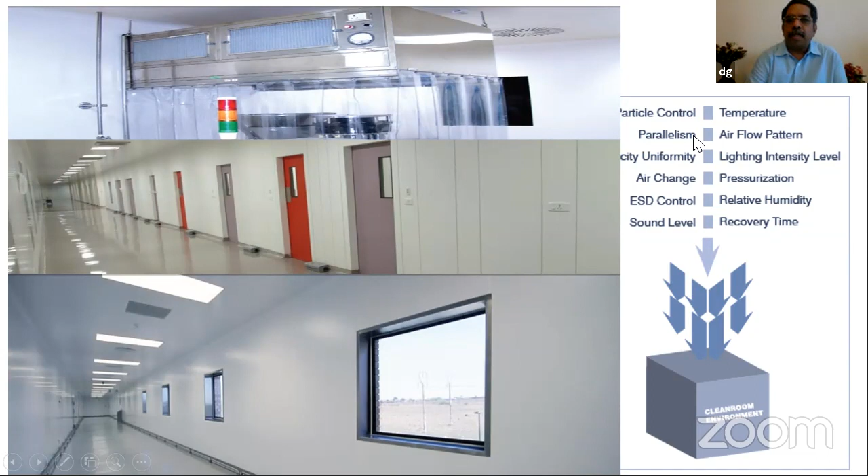Now all these parameters need to be moderated according to the processing technology you're talking about. But the most important parameter that distinguishes a conventional architecture from a clean room is the isolation table.

Here you can see, typically if a cabinet or room is housed near a metro rail for example, you can think about primary airborne sound which is internally present, secondary airborne sound coming from the metro, and structure-borne sound, plus thermal vibration. So you're talking about acoustic vibration and thermal vibration together, which can rattle any structure sensitive to these vibrations.

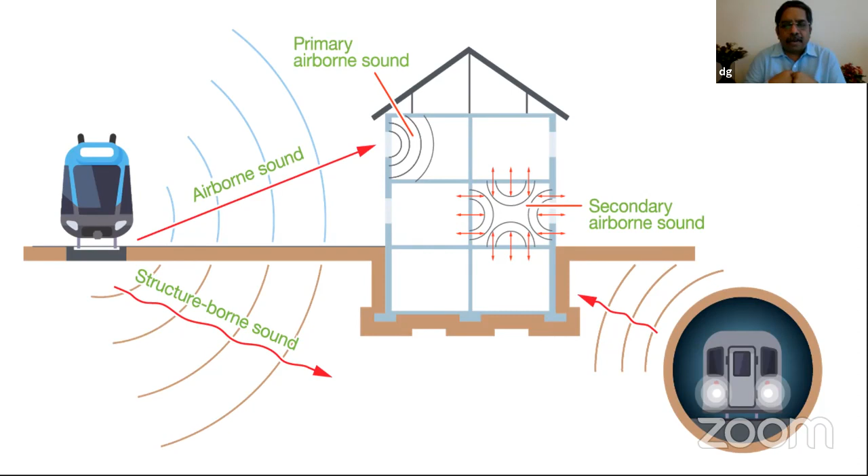Now in a clean room, we actually use a vibration table. A vibration table is a slab which disconnects the room from the building, and the building from the rest of the environment. Therefore, even if there is a mechanical, thermal, or acoustic vibration outside, nothing should technically harm the clean room inside.

In the pictures shown, you have to take care of all these 3 vibrations and isolate your room. This is a cross-sectional view graph which talks about the number of elements one has to take care of when setting up a clean room.

That talks about the perforated flooring, for example, because if you're looking at a very low particle count, you need HEPA or ULPA clean room filters not only on top of the ceiling but also, as you can see here, a perforated floor. The flow of air will be from the top, directly sucked to the floor, or sucked through a return duct kept at the side of the wall. So when you think about a clean room, we are talking about many devices.

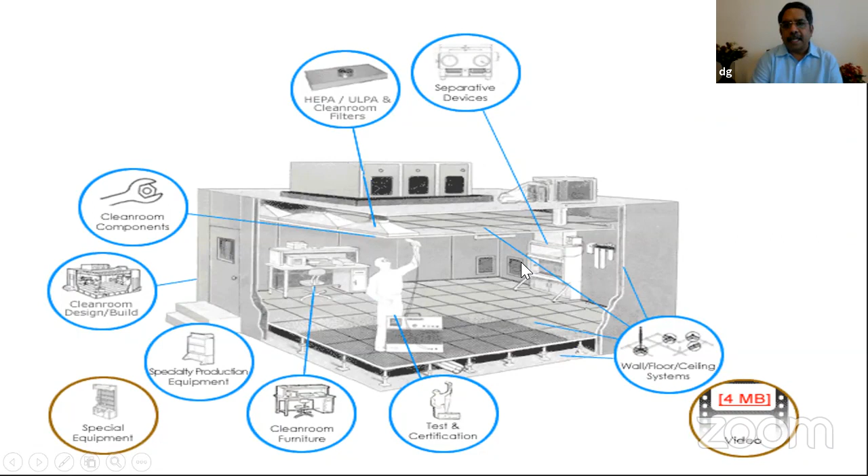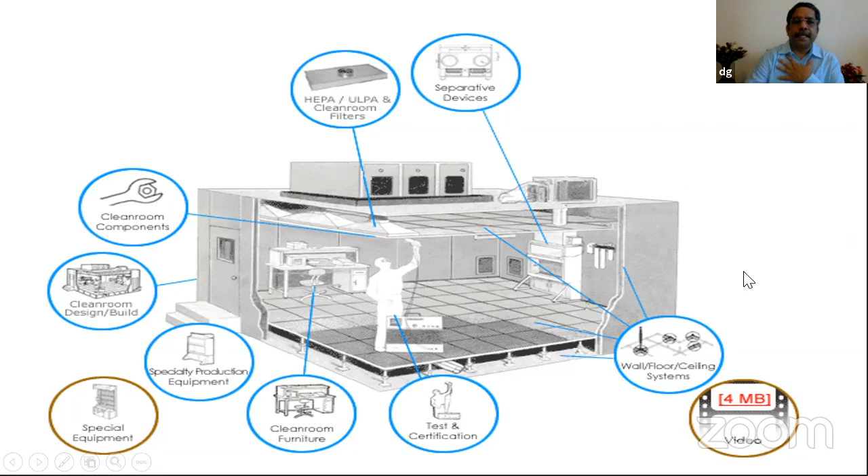First, we take care of the architecture of the ceiling, the design, and the special equipment that needs to be kept. For example, if it's a biological component with specialty production equipment, the suction or return air duct around it has to be different from the rest of the room. Here, another cabinet has a different return air effect compared to the rest of the room. So all these parameters need to be taken into account when talking about the clean room environment.

Now this view graph brings another challenge. It's not only important for us to take care of vibration, the anti-vibration table on which the room has to be set, but also the flooring, the duct, and how the return air is going.

Now, the civil engineering part is not that simple. As I already told you, you have to build a room within a room, a clean room within a clean room, to ensure 100% safety in terms of vibration, light penetration, return air, particle size count, and so on. There are many issues one needs to take care of.

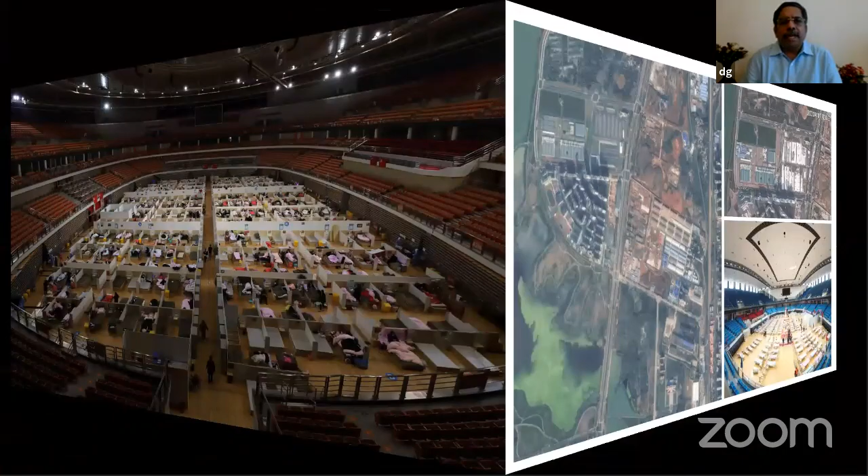So the question is, do we have such a housing facility? Here is another view graph of a stadium converting into a hospital for combating disaster management. Now this is a very good recipe for people in civil engineering to think whether we have such free structures. Not only do we need temporary housing, but we also need it according to medical grade standards.

So it is not simply putting up a shamiana; it has to have all the prerequisites of a healthcare situation. That is one thing that we need to understand.

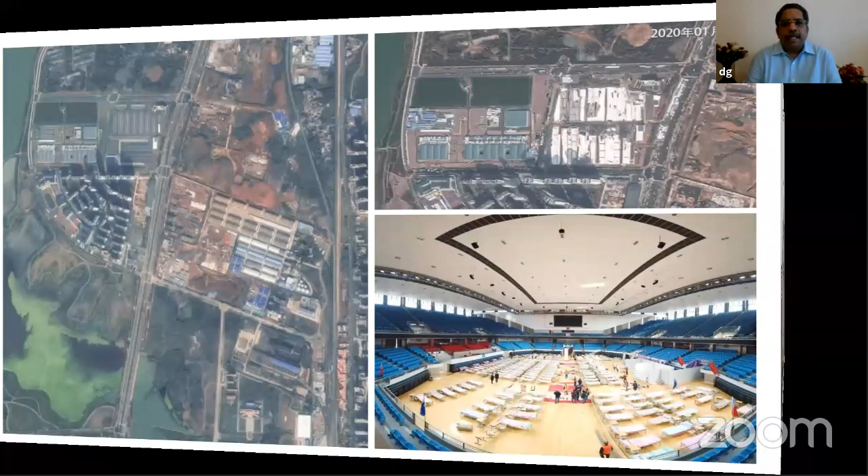In terms of emerging technologies, not only the modular or prefab part, we also need to graduate slowly towards modular construction. Such constructions may be done in parts in some regions of India, but this has not come as an end-to-end solution for constructing modular walls and structures in record time. We need to ask this question time and again to see how far we have matured in such technology.

This sort of modular construction also brings in principles of 3D printing. We have been talking about 3D printing, but we have not literally demonstrated even a gypsum-grade material for 3D printing for modular construction.

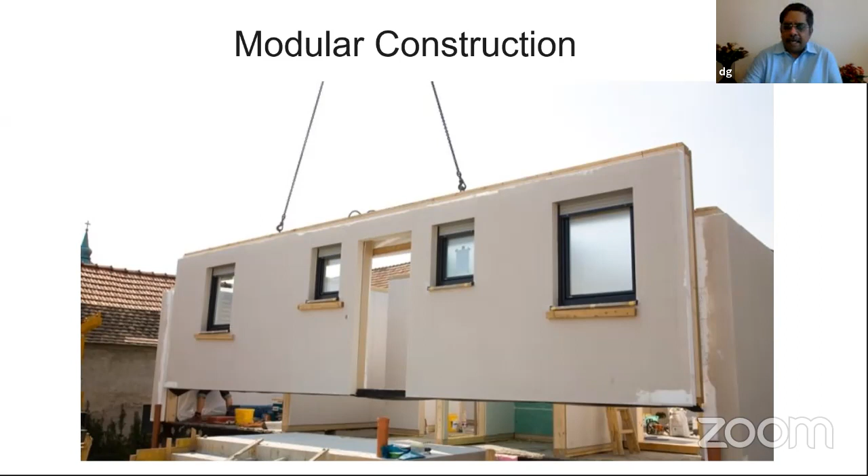These are very effective. I found another participant, a professor from Nepal, places in seismic zones where the situation is very prone to seismic vibration. We need this sort of modular construction to come in place. We don't even have the capability nowadays to make wall-to-wall construction in record time. So this is one area that is a challenge.

This will become a new norm even in offices, big sectors, service sectors, and even educational institutions, this may become the new normal. But the question for us is, we cannot build this on a permanent basis.

Do we have low-cost machinery to bring about the same changes? Do we have the chemistry part of the sanitizing solution in place? Do we have a design for nano mist so that we can optimize the wastage of sanitizers? These are all big questions.

Now, we can conveniently go and start buying from a vendor. In fact, this is a prime opportunity for such enterprises and technologies to come up. For the next 2-3 years, until the pandemic completely dies down, this will be the new normal.

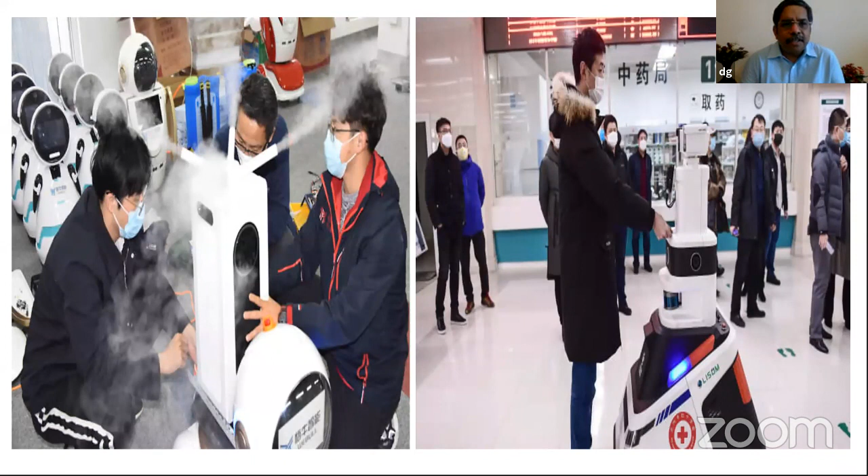The other thing civil engineers especially need to understand is that from now on, common places are going to be more sensitive. Design of common places like malls and airports may have to take a new look now.

Here is another view graph from early this year when the pandemic was spreading widely. The Chinese went about creating robots to dispense and to take care of measuring temperature. So for a contactless mode, here are some robotic arms coming in a big way to help.

Now, is this the new normal? If that is the case, are we really going to wake up to this situation, or are we merely satisfied about procuring this instrument? That is the question.

When we talk about disaster management, so far it was always thought that it's an engineering solution that should come from civil engineering, but I disagree with that. In the present situation, all departments in engineering and technology, including sciences, have to come together for a common, one-stop solution for any sort of challenge we are facing.

These are some examples I want to bring to you to think in advance, showing all the opportunities for civil engineers to come in.

Here you can see, in spite of the pandemic, people still cannot keep away from mass media and auditoriums, and here people are watching, but they are all isolated. Now, this is not a good business venture; if this continues, all the malls and other places will go berserk and suffer huge losses.

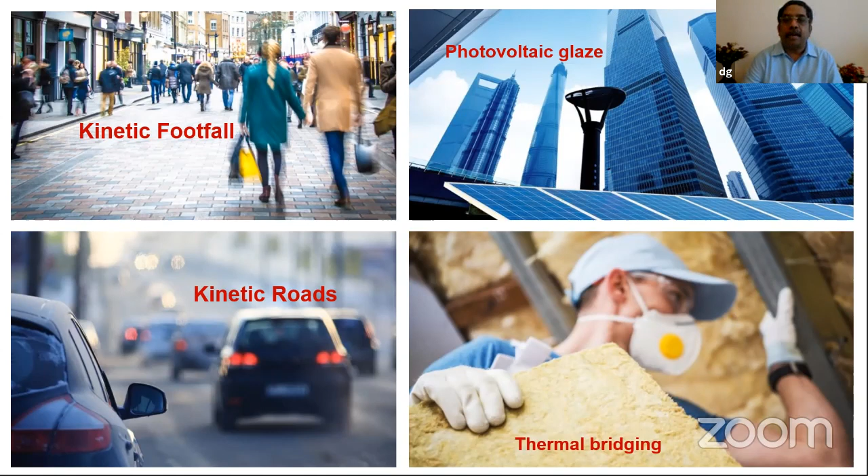Another technology coming very fast is self-healing concrete. But for very specialized structures, this has not yet become the new normal in our civil engineering applications. We are yet to see this self-healing concrete come into wide use.

For want of time, I'll skip this, because it's a technology by itself with potential for marketing and commercial activity. But for us, we need to think: when we talk about a disaster, suppose we want to repurpose a structure which suffered slight damage but can still survive. Do we have a mechanism to repurpose such facilities? That is the question.

Lastly, madam, do I have some time? Another 15 minutes, okay, maybe 10 minutes I'll take, and then do I have time for question and answers? Yes sir, yes sir, okay. Lastly, I will just go through, because this is a big subject by itself, but I cannot hide my excitement.

We have already started this work on 5G applications in our university in Gujarat. I am sure there is great potential in Karunya where you should really concentrate on this, because bringing 5G technology into energy, construction, and transportation is a core business for civil engineers. We cannot keep quiet, because this 5G application is mingled between human-computer interaction, conventional reality, and perception. So human, computer, and environment put together.

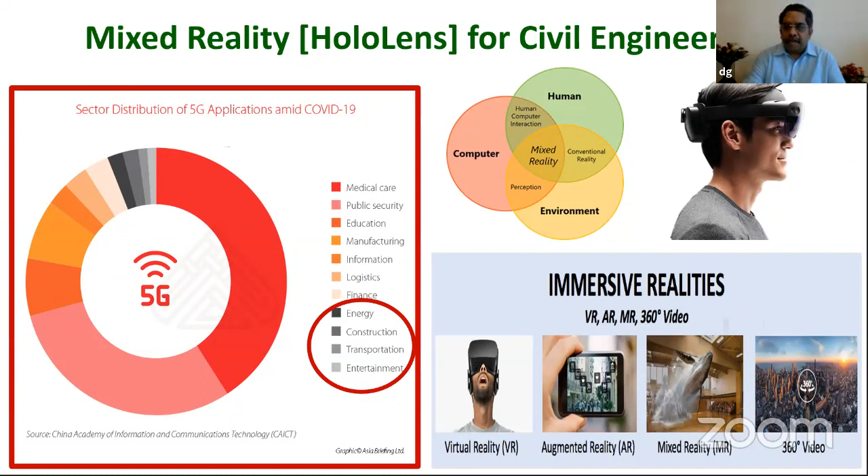Now I have given some view graphs to drive home this point. Please allow me to share a few slides. 5G as a boost for virtual reality in companies. For a smart city situation, 5G is going to be the new normal.

In 5G, because of the low latency slice, AR, VR applications are going to be very, very fast, since the scaling time is going to be 10 times faster than 4G. As a result, in real time, you will be able to map structures. Nowadays in video transmission we are not able to perceive fully, because there is still a limitation with 4G technology, but 5G is coming very fast.

Verizon is working heavily in the US, but Reliance Industries recently announced, in collaboration with Microsoft, that they are bringing 5G technology in a big way. This mixed reality and 5G technology put together is going to be a very good disaster response tool as far as civil engineers are concerned, and I want you to think about this in a very big way.

Now, when we talk about mixed reality, as I told you, this comes from a combination of virtual reality and augmented reality. I will show you some structures.

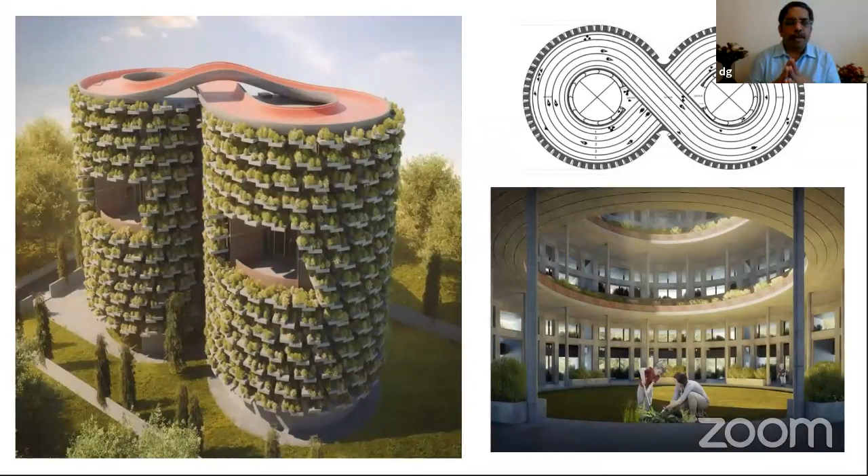Suppose this is a real structure that has been designed in a foreign country with multiple stories, and there is also a cycling ramp kept there for workout, covered by greenery. But technically speaking, you can actually go slice every floor by floor, the rooftop, everything.

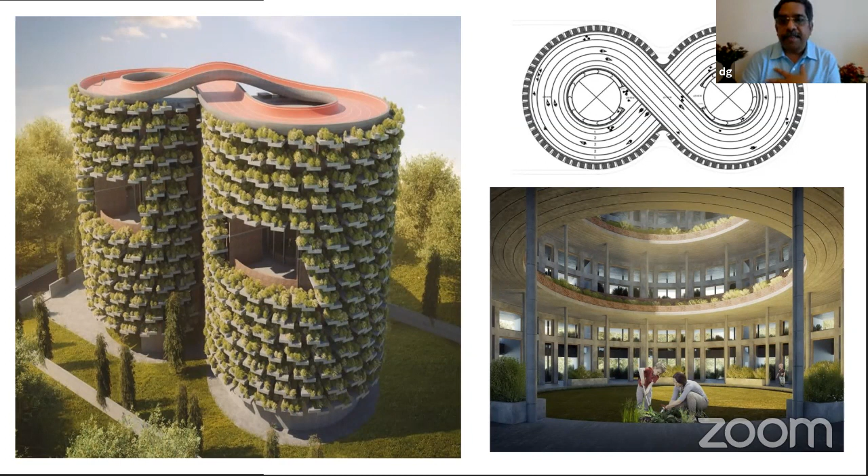You can measure by the distances, not by looking at some 2D pictures, but using augmented reality or mixed reality, you will be able to get the specs. What I've shown you is the track ramp. But if you wear the mixed reality lens, you can go section by section and get to know the dimensions, the projection, the sort of 3D contour, everything can be seen, even without visiting the structure in person. This is the effect you can get, and it's going to affect construction technologies in a big way.

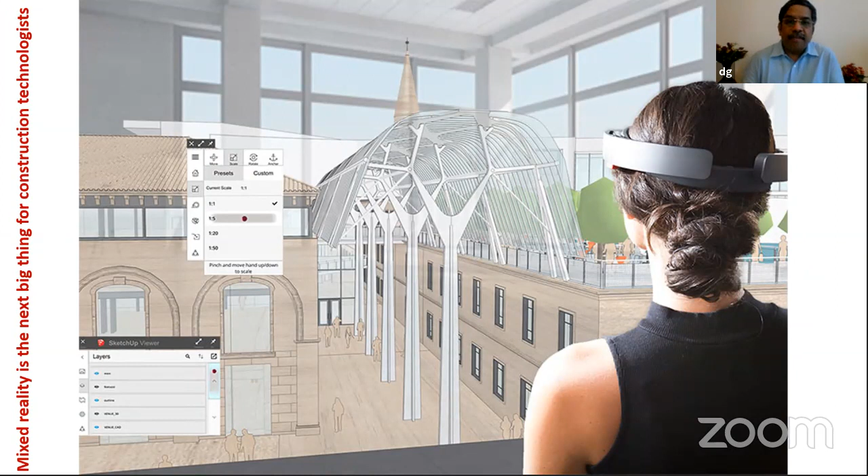Recently, there was an article about petroleum technology excavation happening onshore and offshore, projecting a 300% increase in the use of mixed reality, because in places that are disaster prone, and even where major disaster is not present, COVID has curtailed these operations, mainly because manpower had to be sliced down. In such cases, mixed reality has come in a big way to monitor subsea operations, without having to depute a person to a vulnerable place. So for subsea technologies in petroleum refining or extraction, mixed reality is going to substitute in a big way, and the output is going to be nearly 200% if we combine AR and VR into oil excavation.

This is again going to become a new normal for architects. Architects are going to benefit from mixed reality in a big way, because you can see floor to floor and inspect all the effects if you have mixed reality in place. Here is a situation where you can bring the entire structure to reality, and do a thorough due diligence before you even start building.

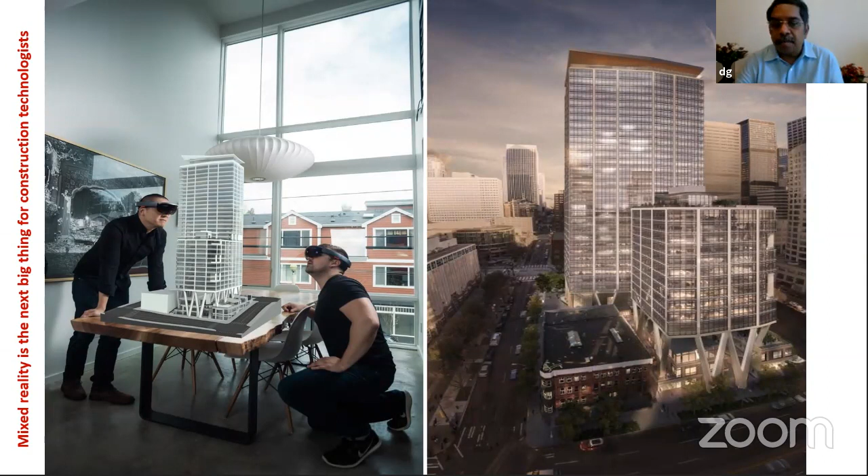I have several structures for that. Here is another one conveying the same new normal, and this is going to bring about greater clarity, both for those who are investing and those who are waiting for their room, bedroom, or structures that are coming. They can literally have a virtual tour of the coordinates they are expecting to have.

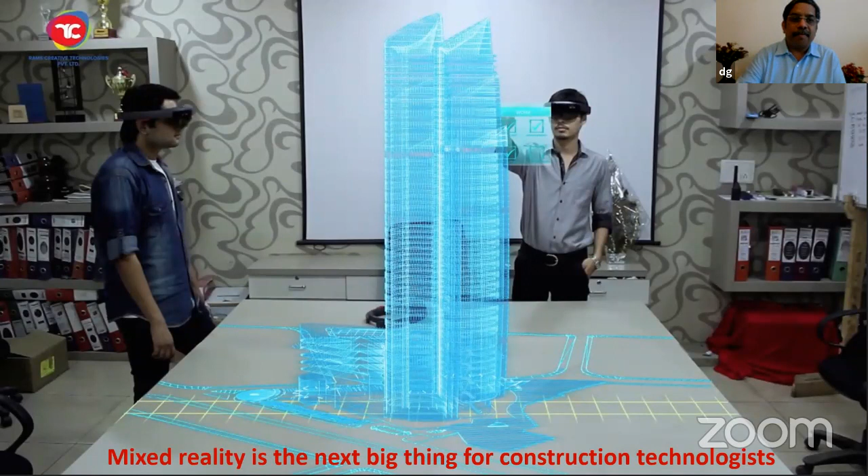In fact, it's going to affect interior design in a big way. Not only can we render some 3D design, but we can actually create it even before we start planning. Here is another example of the same, where you can slice and go down view by view on different specs that we are looking for.

Here is another example I would like to skip. And here, when you try to take it in a bigger fashion, as a community or municipal issue, you can create the same situation in a 3D model of your downtown, and you can even plan disaster management issues that can spring from such a close-knit community. So it's not only about building a structure, but building a township and looking at it as a whole to see how you can generate the soft areas for disaster management.

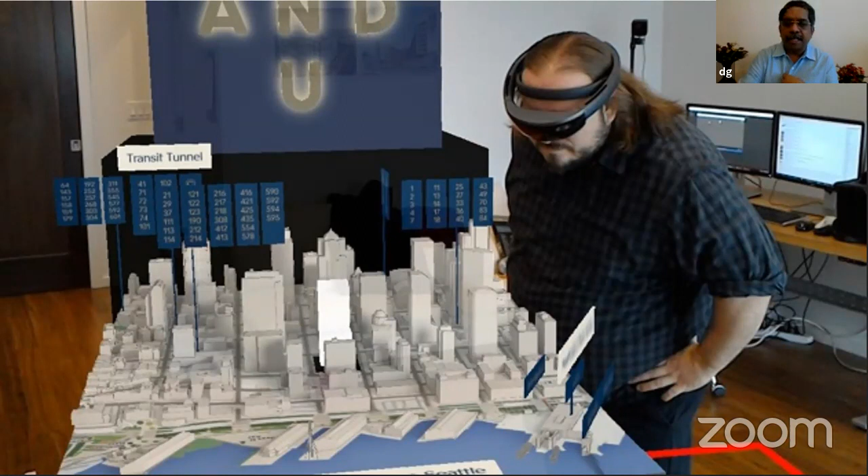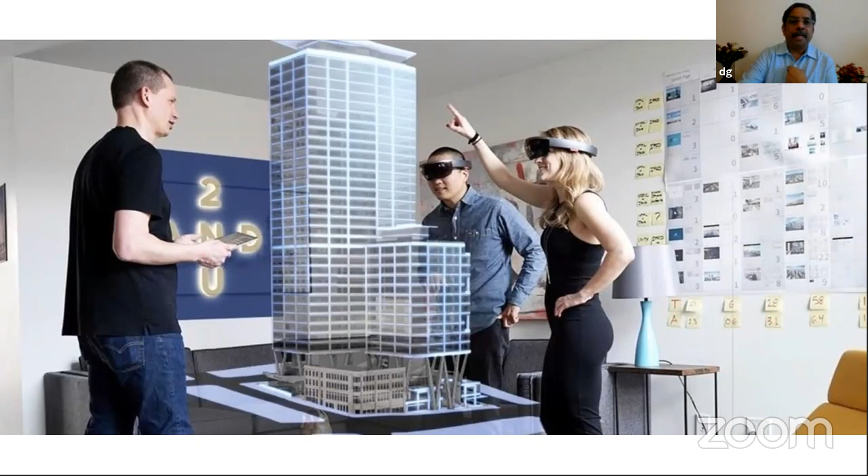So this can become a thorough analysis if you incorporate mixed reality, which is going to be the new normal. And from the architectural point of view, you can bring about many events and decisions, and brainstorm on several issues before you even kickstart your projects.

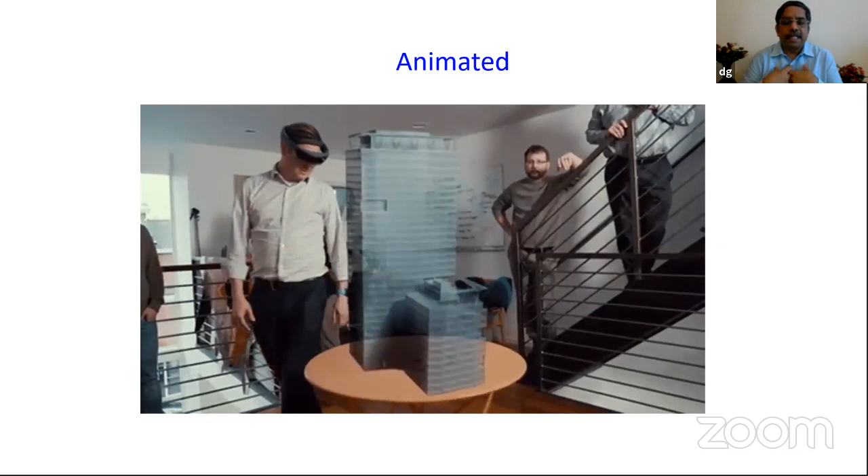Here you can even animate such an effect. You can go around the building and try to see if you've missed out any of the vulnerable points in disaster management using mixed reality. So this is something the department, the school, or the university has to invest in, to become stronger, so that you not only learn this new technology, but can actually do several consultancy projects with the expertise that you have.

This is again a view specially designed after a big community is planned. You start looking at the disaster management protocols, whether they are in place in such a crowded environment. This is a very intriguing example one can think of.

This can even become study material. Our classrooms will soon turn out to be that. No more waiting for printed 3D models or ball and stick models for realizing what you are trying to propose. This is the new normal that will set in the classroom as well.

One last thing I want to share with you: the issue is not only about previewing, but using mixed reality in places you can't reach. You can even get all the specs pertaining to the entire operation of shifting blocks, whatever parameters you want to know, without even housing a person on top.

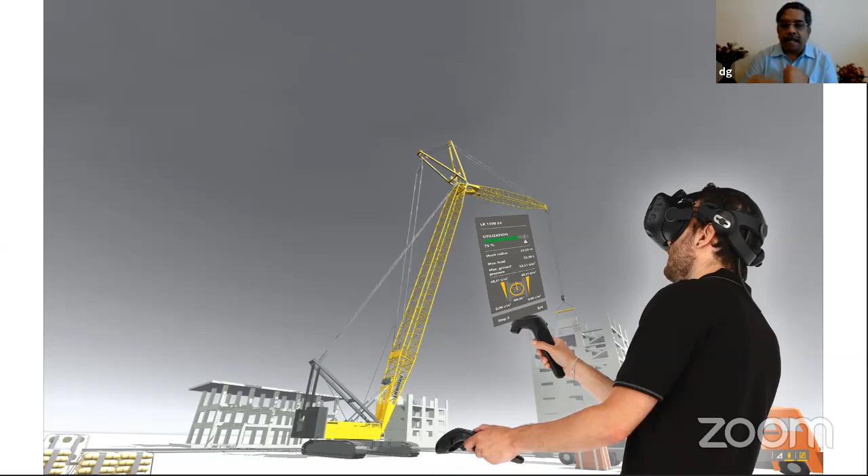You can try to get all the details. So you can get all the specs needed in a construction area like this, just by standing in one corner and getting the information.

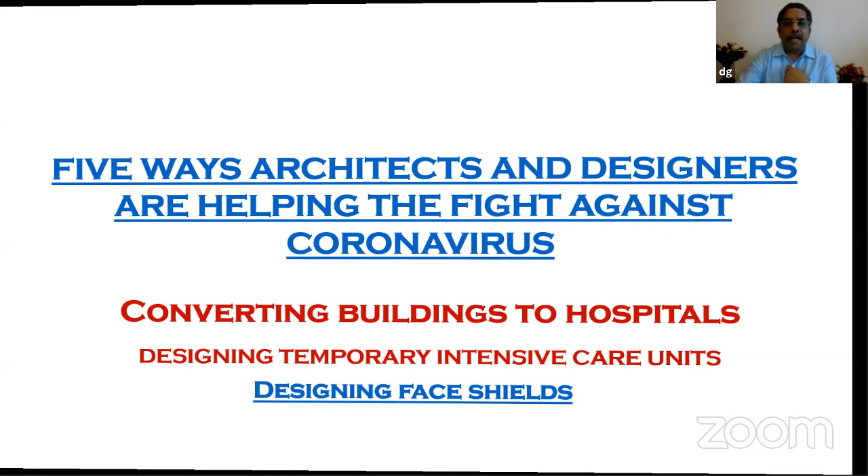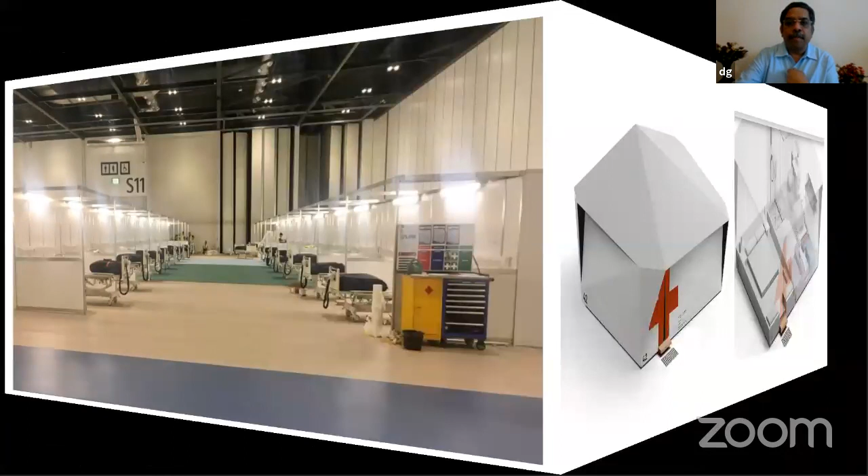Lastly, I want to show how converting buildings to hospitals in healthcare, people are using mixed reality. Here you can see how they have made an emergency layout, and even in a tent sort of situation, how you can have clarity to make mobile units like this.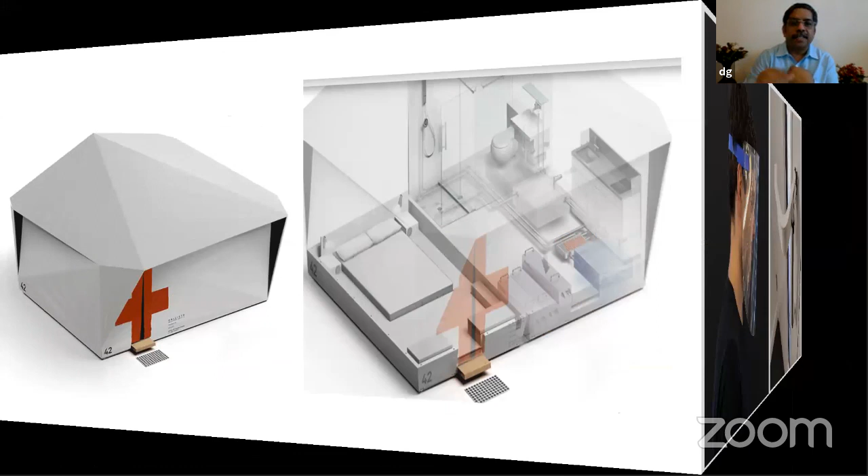This is also using mixed reality. You can try to bring it, and also discuss along with the doctors even before you construct.

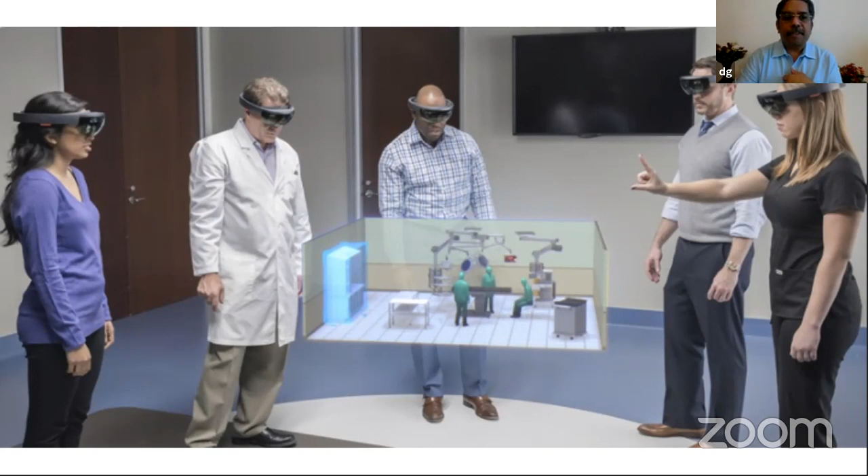You can simulate an operation theater, and spec for spec you can bring more clarity. So you can define to the engineers who are going to design your OT what sort of equipment has to be in which proportion, what is the angle, everything can be foretold.

So typically you can scout your project management committee, your architect, if you are a physician, as to what you would like to see in an operation theater, which as of now is a million dollar question.

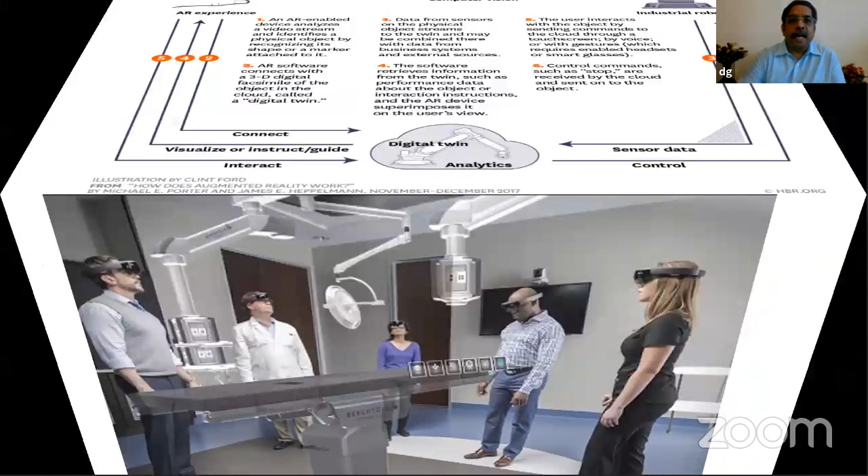So these things are soon going to overtake us. But the question is, are we really there? Merging the real and digital world is going to become an experience, although COVID is keeping us away.

But if you as a university want to invest, I would suggest you go for mixed reality, because although it is costlier, mixed reality will bring even a multi-story structure into the classroom in the midst of a person, rather than asking him to have a feel in a video, on mobile, or seeing a structure in VR, what we usually are used to in a 3D theater.

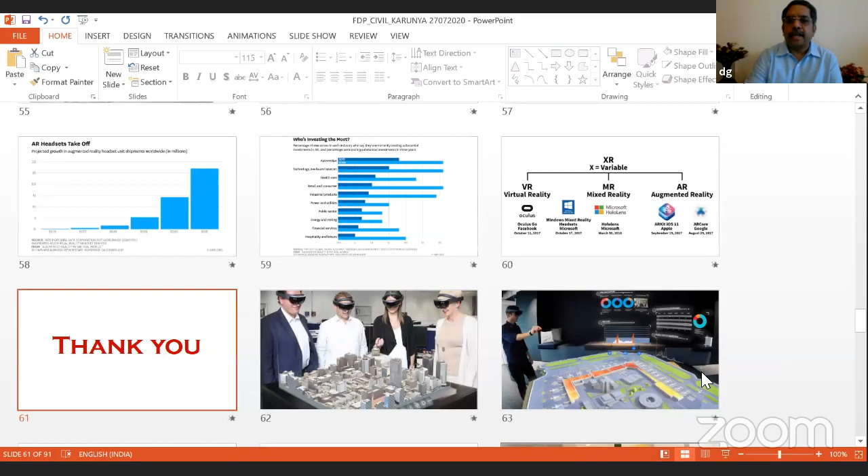So I have highlighted some of the emerging technologies, not necessarily with disaster in the background, but technologies which in the present pandemic situation are becoming more and more relevant. I just hope Karunya will be able to invest more into this, and also those hearing from other institutions will have some take-home message from here.

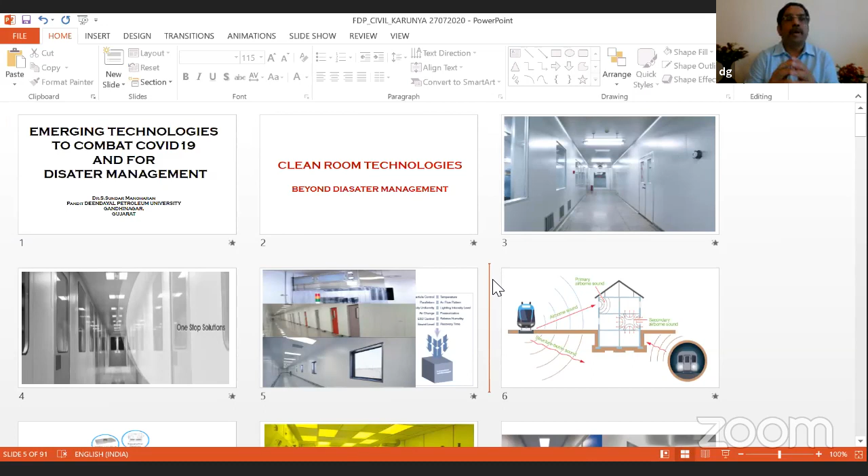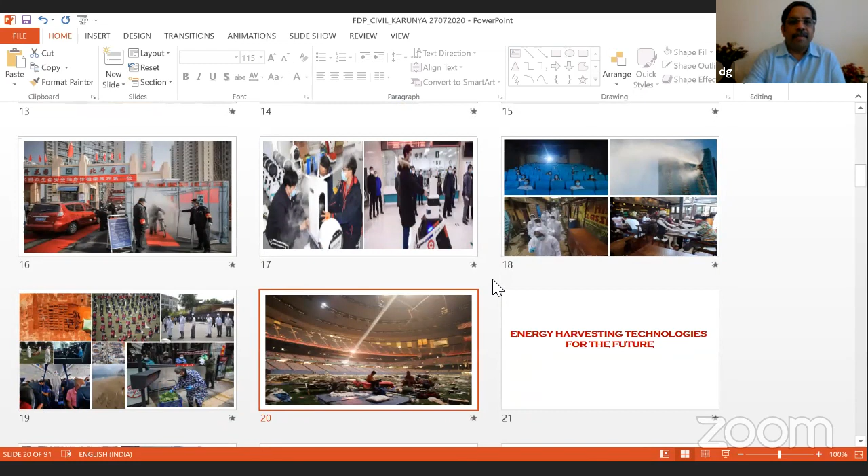We cannot be mute spectators. Get into some real commercial enterprise, especially clean rooms should become a new normal in our educational institutions. We don't have to go to others, but we can make such isolation tables ourselves. We also have to be prepared for combating any sort of events we are experiencing right now.

So with these few words, let me stop here and take some questions from you if you have.